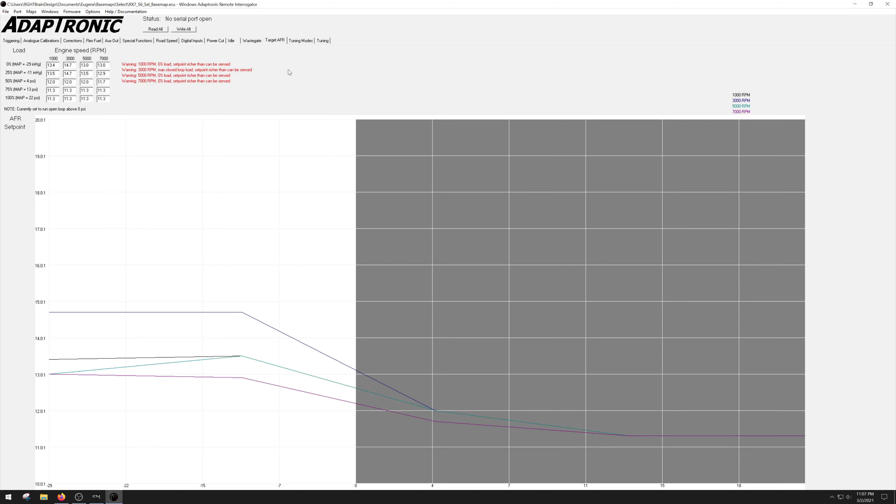And the more and more I look back, I'm like wow, I would have been pretty fucking pissed off, because even reading a simple Greg Banish book or talking to some people in the EFI community, you'll know right away, like smart people don't use shitty systems.

I know quite a few people that will tune only on AEM or only on Motec or whatever it is that their system and their workflow is.

Okay, so I made this thread back in, when was this? It might have been 2018, yeah. April 2018, and this is kind of after I'd already purchased the ECU.

I'd seen Nick and the boys over at, I think it was SEMA. Shit, that was a great year.

Definitely had a good party. They had me known as the American, which I will take that, and I will fucking party my ass off every time of the day. That's just a week-long party over there.

Anyway, so I went over this stuff, and before deciding on this, I had gone through the software of every single ECU in the market at the time, and I went through price breakdowns and talked to various tuners of each one, and kind of got my own understanding of consumer grade, and I created and classified what I call consumer grade and motorsports grade ECUs.

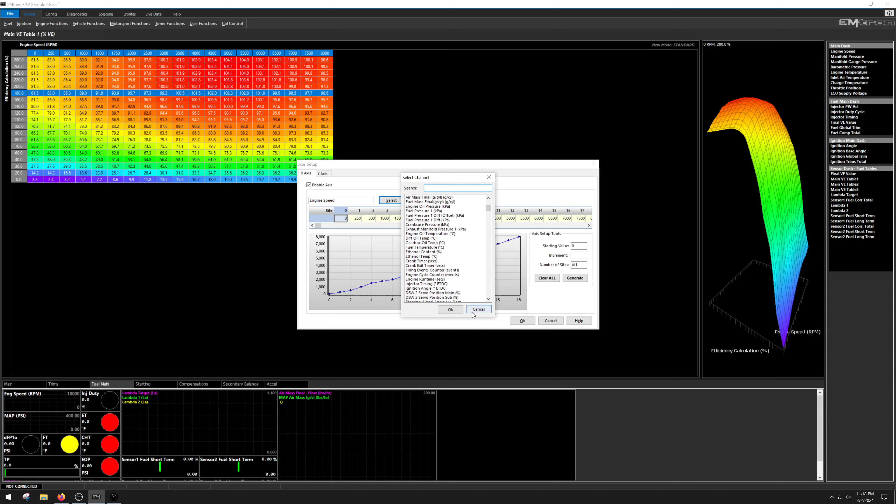I could do something like an alpha-N setup or throttle mass flow setup, but that's a whole other huge video series by itself, just covering how it measures air. This is to simplify what a VE table is: a modeled airflow calculation of the engine.

So at this point right here, there's a pointer at 1000 RPM and an efficiency calculation of 70, let's say around 70 kPa. That's not exactly correct since this is all scaled, but we're saying the engine is 64% volumetric efficient, so it's filling the cylinder 64%.

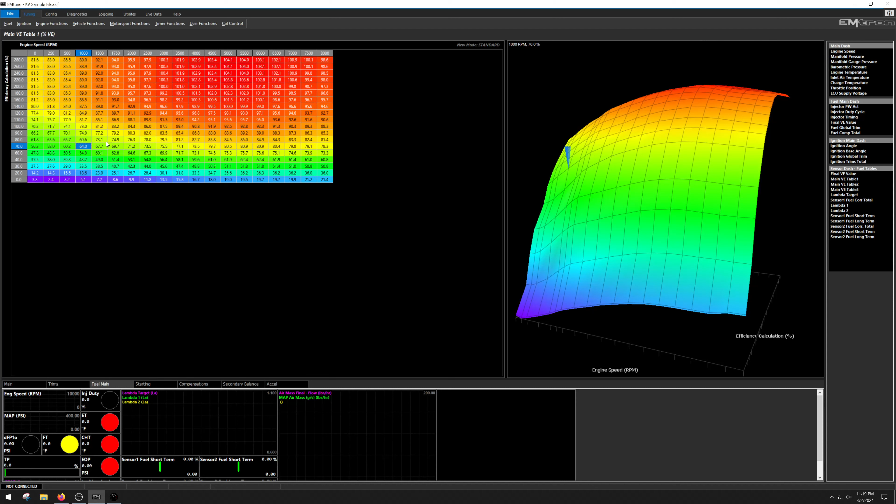Of its value, which is why when you're in boost you'll see positive values over 100. You'll see the engine fall off in efficiency due to RPM because of back pressure in the engine itself. You have optimized fuel filling between 45 and 55 in this model, and then back pressure creates less filling, choking the motor as the engine revs further. That's why it's falling off.

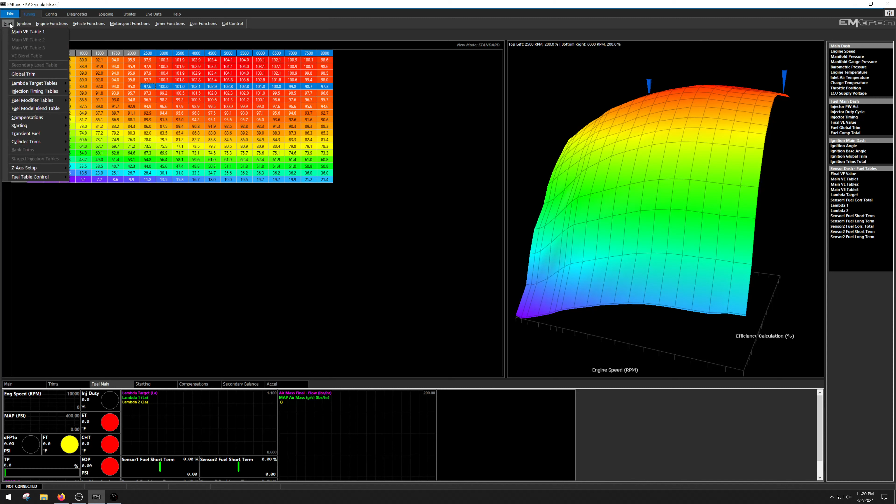So that's a quick rundown of that. Stuff like this you could set up as a lambda table, very common. Then you'll see stuff like an offset table, engine temperature versus pressure. This one you could set up totally different, like I said, any axis you can imagine. Injection timing is very important too.

So the workflow is very intuitive. There are a lot of layers, and you could do a lot of blending between tables, which this one has all turned off, but it's incredibly intuitive when it comes to configuration. There's just a lot of it. This is one of the ECUs where you could spend weeks setting up a base map.

But once you get it down and have a formula for setting up a particular engine, the tuning process becomes incredibly quick. Stuff like transient looks very simple here. We'll go through a clamp table, like having only a 28% maximum percentage over your base fueling, and a sensitivity table based on the change in throttle position versus manifold pressure of the engine.

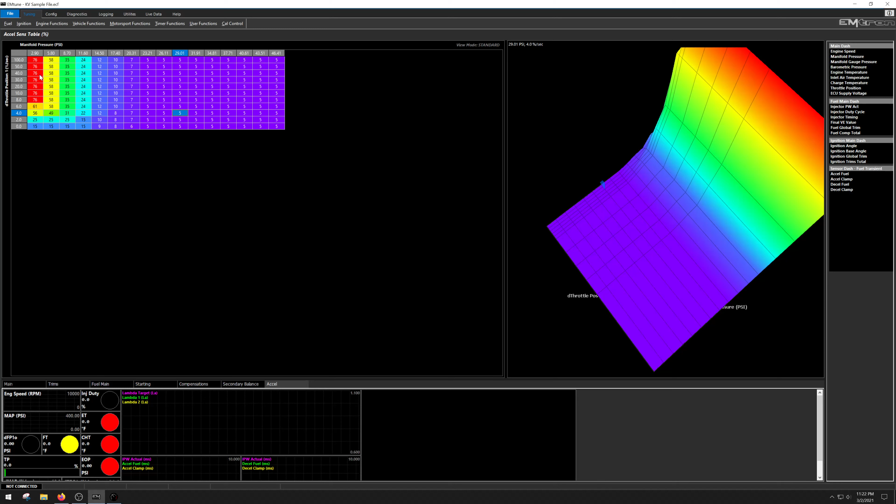This being atmospheric, this being under vacuum, and these values being absolute. So in other words, you're going to need more fueling when you're requesting a rapid change in pedal position combined with low map pressure or high vacuum. You need more fueling here versus when you're already moving and the engine's running, where it won't need as much.

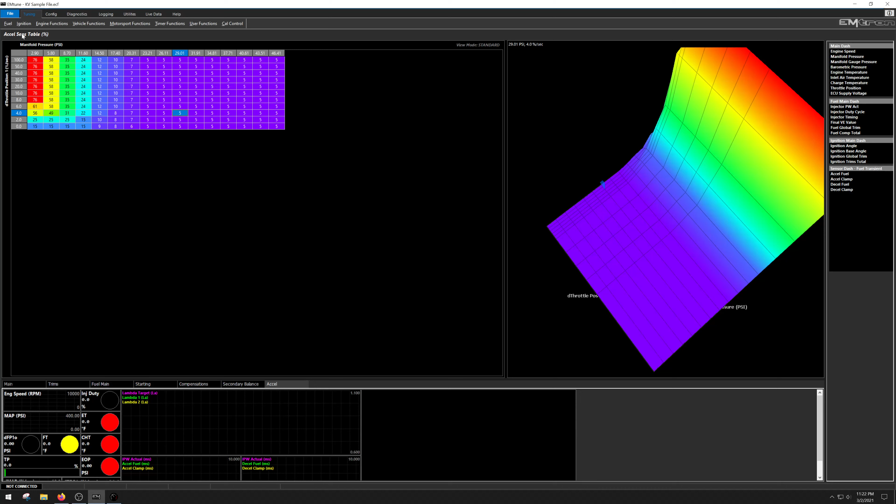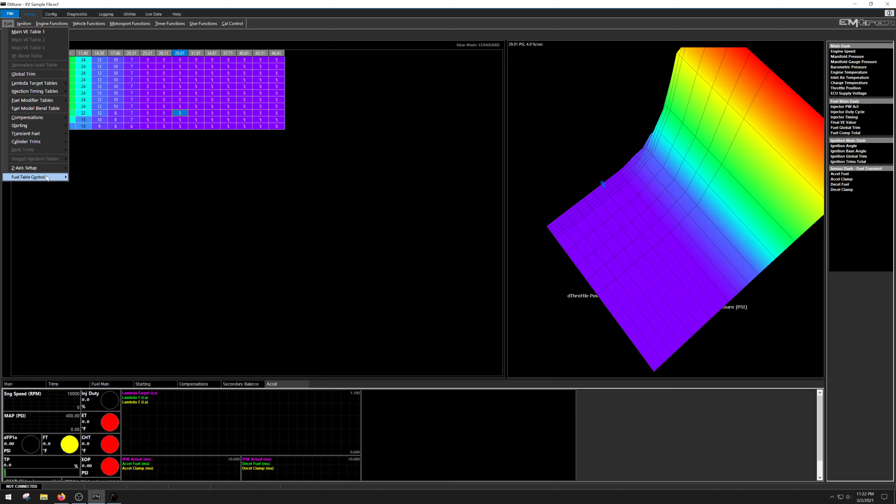And then we can go through stuff like cylinder trim, Z-axis setup. I can set up axes of flex fuel and charge temperature and everything else based on this. The reason this is grayed out is because you go down to this fuel table control and say you want this on a Z-axis, so I click 6.

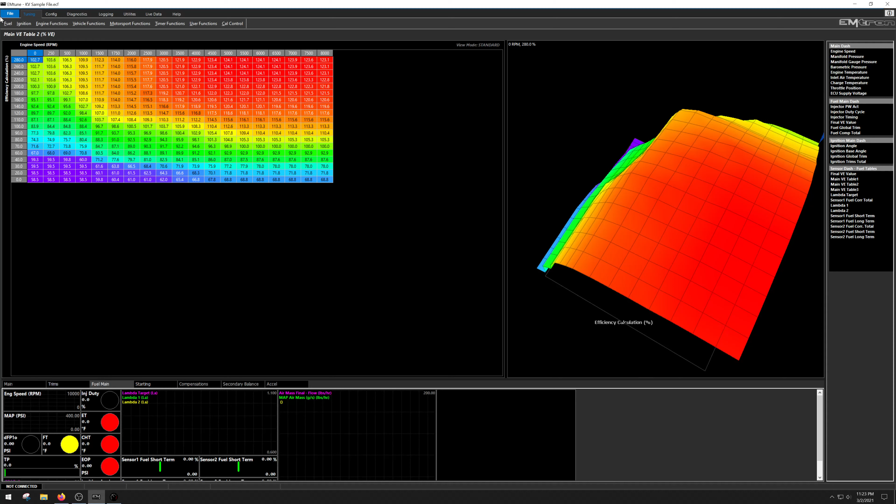Now it's on a Z-axis, so I go through fuel, and now I've got 1, 2, and 3. Then I go to my fuel table setup, and now this can be 1 to 3. Do this linearization, and there you go. So when ethanol content is 10%, well you'd never keep the table like this, but at 10% it'll be 1.2, so it's going to be mostly this, and then 20% of this. That's how one little process goes for configuring fuel table controls.

But we could be on this for days, and that's just the most basic configuration. One thing about this ECU that's absolutely incredible is you can go through and do much more chassis design stuff. So beyond your engine controls, you have vehicle functions.

This could be torque-based model, transmission slip, clutch slip. You can go through gear management, like auto-blipping a manual transmission based on clutch and brake, based on estimated horsepower loss on the engine, which is really cool. Again, it has an accelerometer in it, so it measures G-forces, and you can use that G-force sensor for other controls.

Alternator control, turbo scavenging pump, closed loop stepper control, like I can do an OMP for rotary right there. Flame control, which I mentioned in one of the last videos. Rolling anti-lag, launch control, all these are chassis related. A bunch of different timers if you want to do a drag racing setup with a delay, perfect for a nitrous setup.

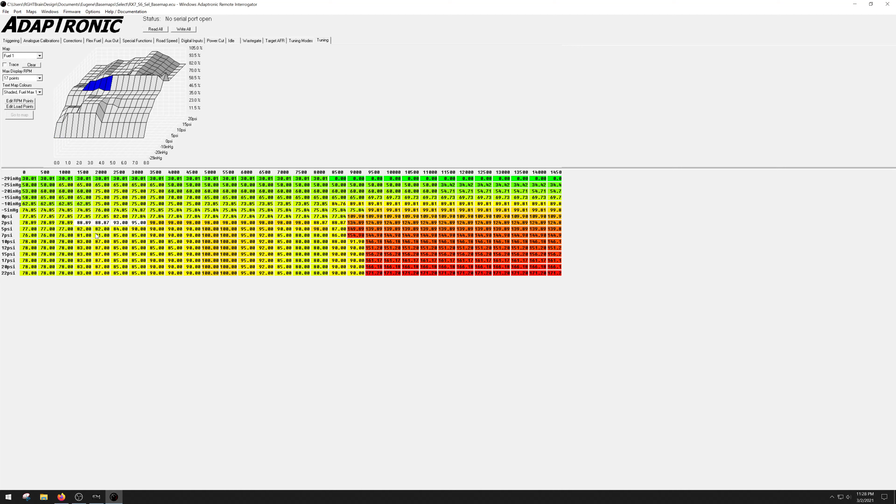And even looking at the base map that they had, this wouldn't make any sense. Like, you go and smack the throttle, you've got a bunch of fuel here, then it tapers away to nothing. And then you've got a bunch of fuel here, then it tapers away to nothing, and then it goes up to this, which will never run, 14,500 RPM. For a base map, this is really almost pathetic.

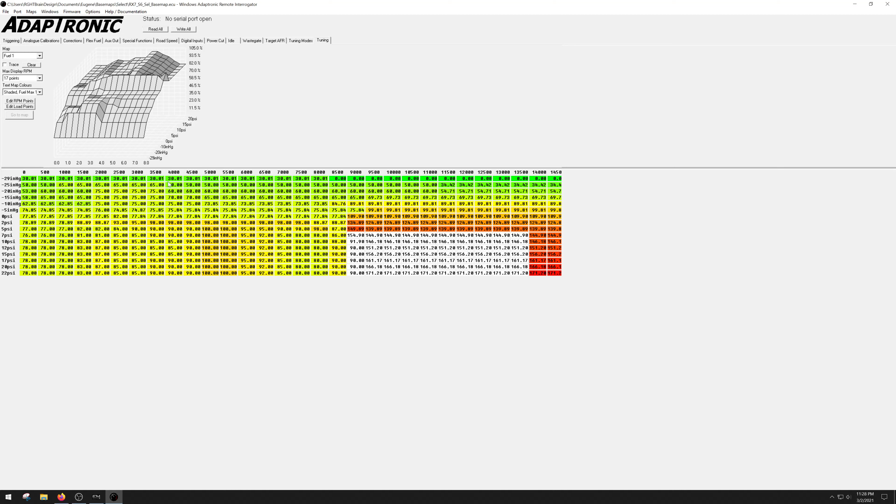I don't know, I figured you guys would want to see a little bit of that. It's just a completely different world.

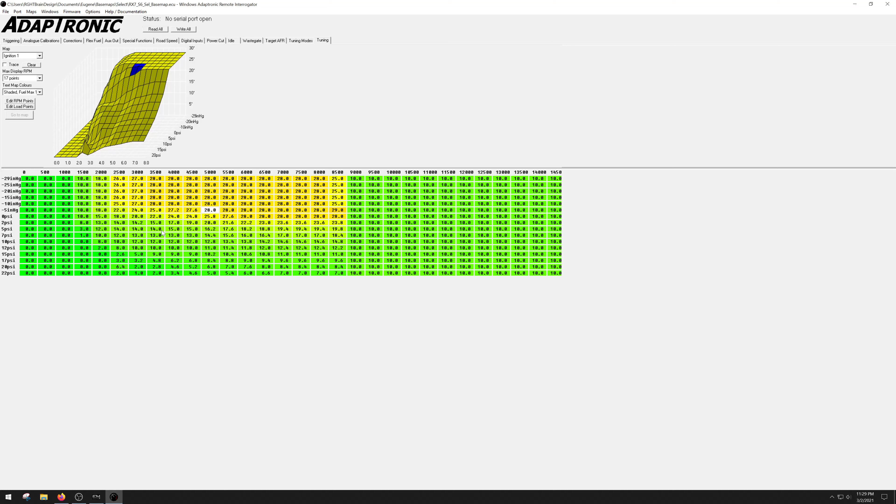And if you're able to see it as it is, if you're able to do this sort of analysis to where you can say, my money is worth this, my investment for this car is worth this, then you can start understanding why I am very critical when it comes to pushing technology, educating my clients, and making sure that people are informed on their decisions.

I'm not some fad chasing idiot. I'm the guy who goes and challenges people and says, okay, you said this can work, show me. And I'm the one who tests stuff out. I'm the one who's straight up telling people to their face that they are lying to people about sales and shit. Why? There's no reason.

It's better just to show data. Approach this stuff with an open mind, and hopefully try out some of the softwares and stuff before you go and decide on an ECU. I don't care who you use for tuner, I don't care who you use for purchasing stuff, but don't be a fool. There's no reason for it. The internet is the most powerful tool known to man. Do some research and don't be a lazy shit.